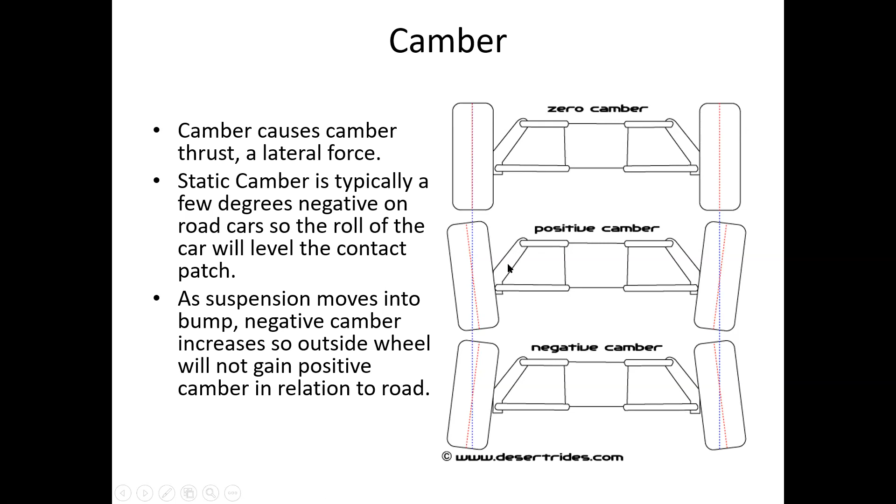Positive caster increases steering effort, making it harder to turn your steering wheel. However, you get steering feedback - the driver feels how much traction the steering wheels have. It also self-centers, so you can let go of the steering wheel and it comes back to center, which any production car does. If you don't have that, it feels kind of spooky driving a car that doesn't return to center on its own, and it's just not safe.

Having positive caster actually increases your negative camber through steering angle - when you steer the front wheels, if you have caster, your outside wheel, the one taking more load due to weight transfer, will actually lean in a little bit. We'll get more into that later.

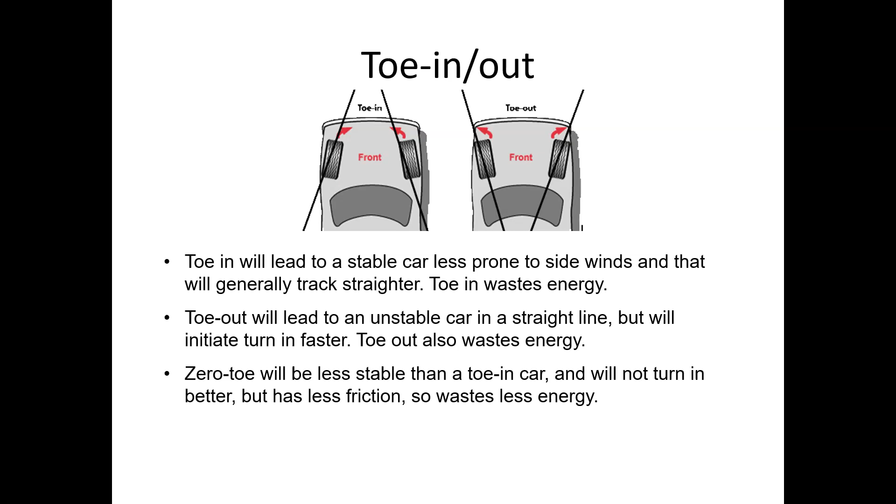Now, rod ends should not be loaded in bending if you can avoid it. And if you can't avoid it and you load a rod end in bending, make sure you do the math to show that it will survive. I'll get into where you can find an example math problem of that later on our website. So try not to put rod ends in bending.

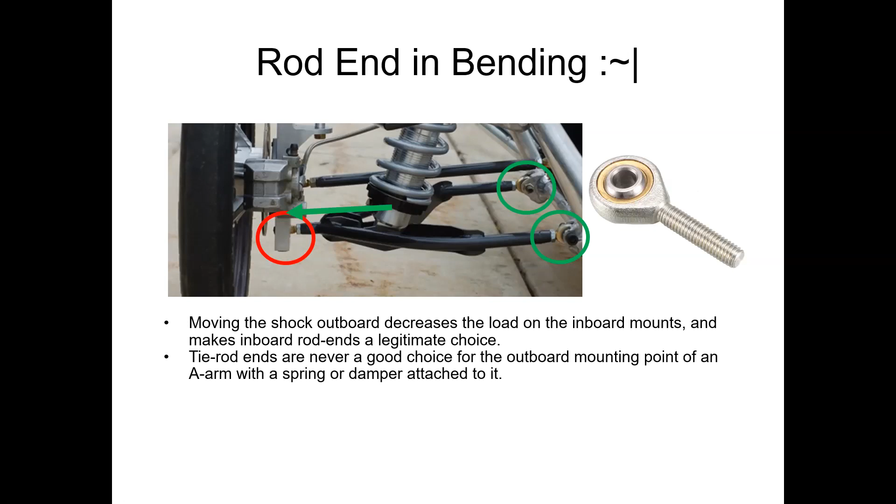Regardless, this one out here on the A-arm that has the shock attached to it is going to be loaded in bending, and it's going to have a fair bit of bending force on it. That is not a good idea with a rod end, because this part here is not made to be loaded in bending.

So an alternative to using a rod end at the outboard side of the A-arm that has a shock on it is something called a spherical bearing, which looks very similar to this. It just doesn't have this part over here that isn't supposed to be loaded in bending.

So when you design your A-arm, you would make a round enclosure, press fit this in, and have a snap ring on at least one side, either a shoulder or a snap ring on the other side. Ideally, a shoulder on one side and a snap ring on the other. You can't just rely on friction to hold these in. By the rules, you have to have a positive engagement, such as a snap ring.

Another alternative to a tie rod end would be a clevis bushing. So if you just had a tube in your suspension, and you put maybe some Delrin bushings or bronze or whatever in there and put a bolt through it, that works pretty well.

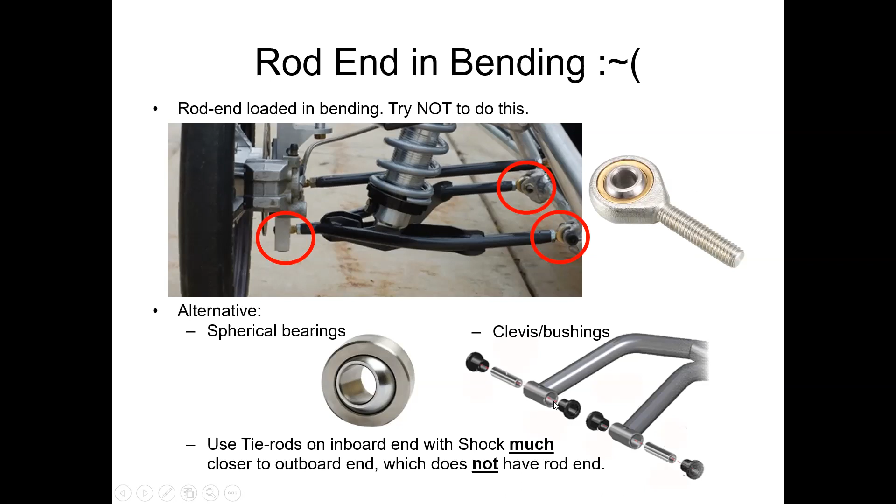Built-in adjustability. I would really stress this on any car, especially cars for teams that are just starting out, or for people starting with even an established team. Really, any car, make sure you have adjustability in your suspension.

And I don't mean just the capability of adjusting your camber or caster, but the capability of adjusting parts from where you intended them, or where they wound up after manufacturing, to where you wanted them to be. Because tolerance stackups don't always work very well, parts aren't always made to the right dimensions, and sometimes mistakes are made. So it's nice to have enough adjustability to make everything work the way you wanted.

If you build in adjustability, you can use less precise manufacturing methods, and it's easier to align your car. If you have an accident and damage some suspension parts or your frame, having enough adjustability might let you still make your suspension work even after that damage.

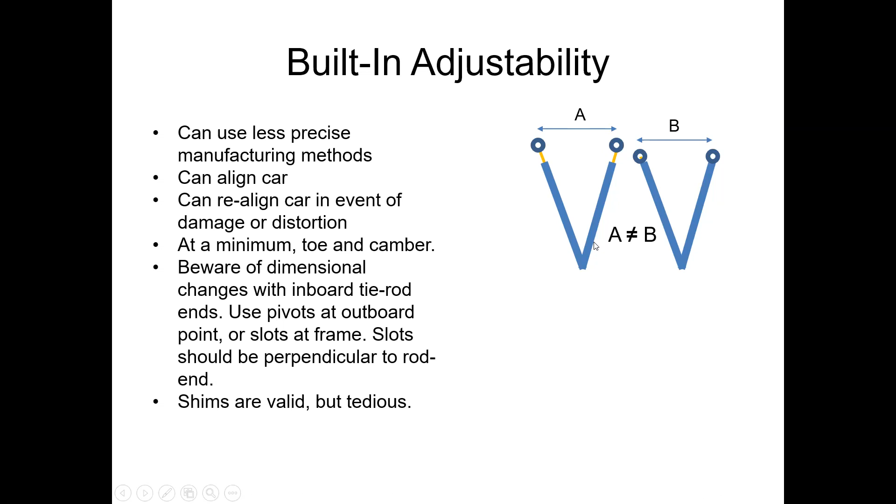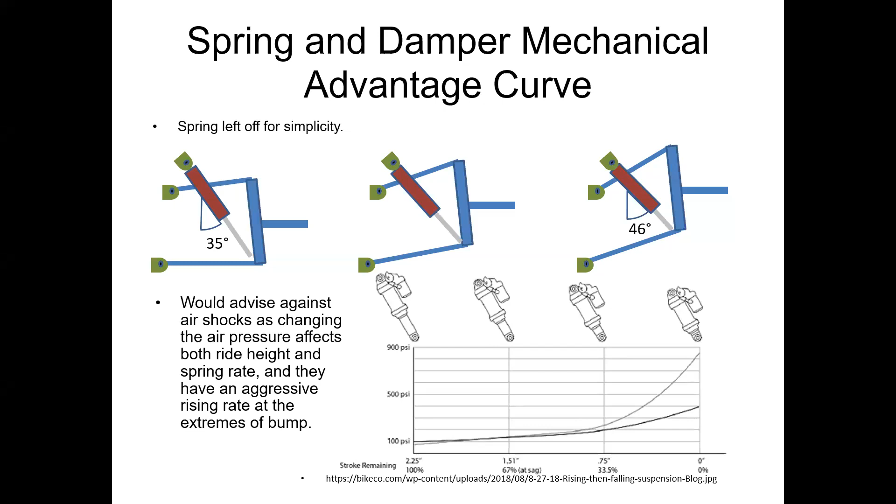So as you've gone about 3/4 of the way through the travel of the air shock, everything is behaving linearly, and then suddenly your spring rate starts climbing very quickly. So it can almost feel like your spring rate has gone to infinity, or you've run out of suspension movement, and you wind up with some spooky behavior in your car.

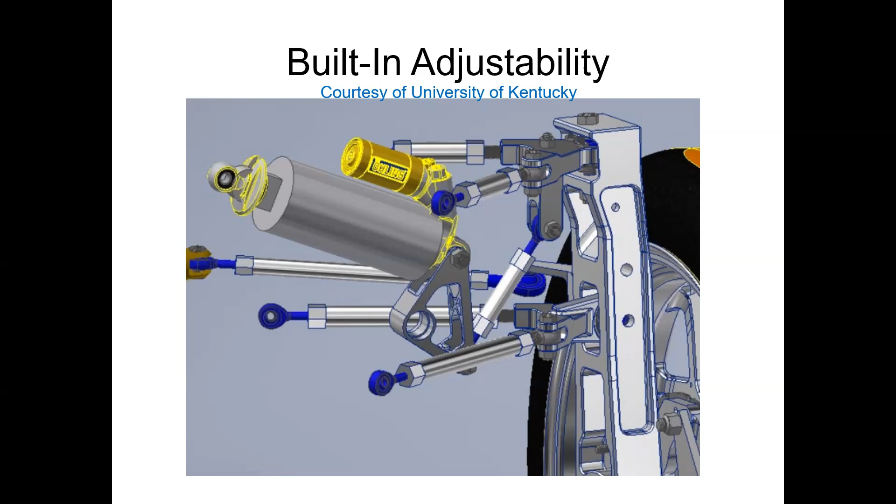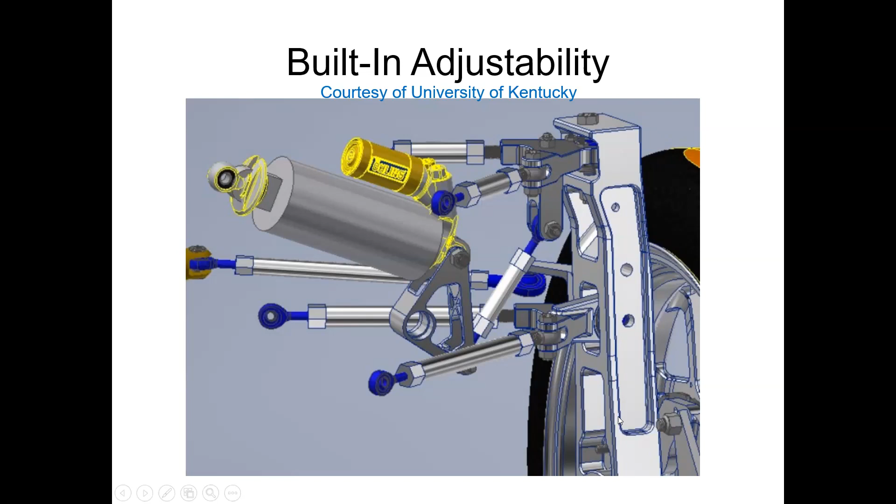They're happening way down at the contact patch. So if you look at this, let's imagine we're sweeping here. As you're sweeping, use this hand - if I kind of did these backwards to how you would think about it, just bear with me here, I'm actually making a point here.

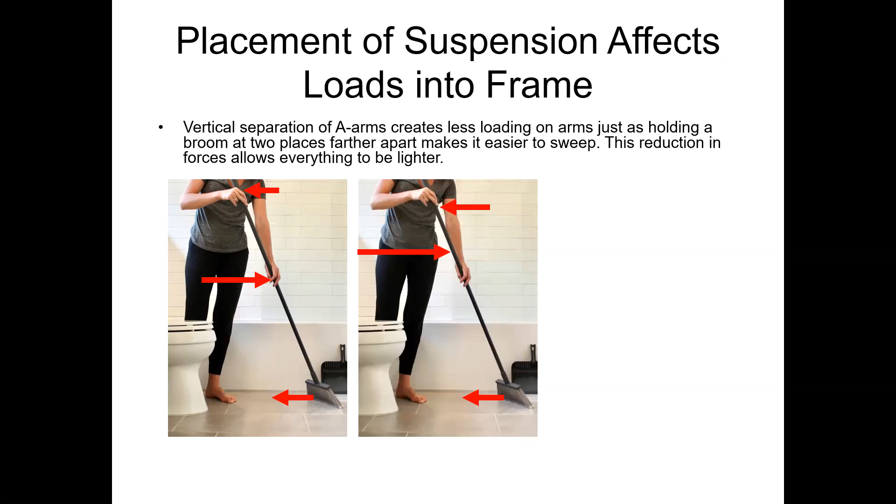Okay, so you're actually going to be pressing this way and pressing this way, and the broom is going to be moving this way, but the ground is going to be pressing on the broom this way. If you move your hands close together - imagine moving your hands closer together like this, holding them here - you would have to press pretty hard with your two hands to actually sweep with the same force going across here.

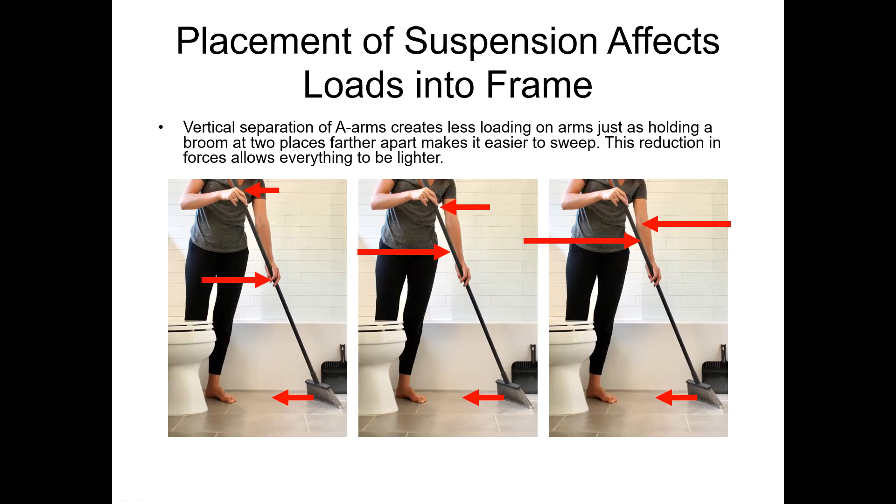And it's the same thing with the suspension on a car. If this is your upright, and here's your axle, and here's your wheel, if you've got your mounting points here and here versus here and here, or at the extreme here and here, the amount of force that you're going to have to put on these two points is ridiculous, because you're reacting a torque being created by this force here. So this force is going this way. Your lower A-arm is going to push out, your upper A-arm is going to pull in, which may seem counterintuitive, but your upper A-arm is actually pulling in.

And the closer you have those mounting points together, the higher those forces are going to have to be to react to this torque.

So a better solution would be to have those mounting points as far apart as possible. And if you look at a production car, this is what you're going to see, where just about every race car that uses a double A-arm suspension is going to have the lower ball joint way down here and the upper ball joint way up here, or some even higher. Since they're outside of the tire, they can actually even have them up here.

So the reason I mentioned this is if you have lower forces in your A-arms, you also have lower forces on your frame. Lower forces in your A-arms allows you to make them lighter, and lower forces in your frame allows you to make it lighter.

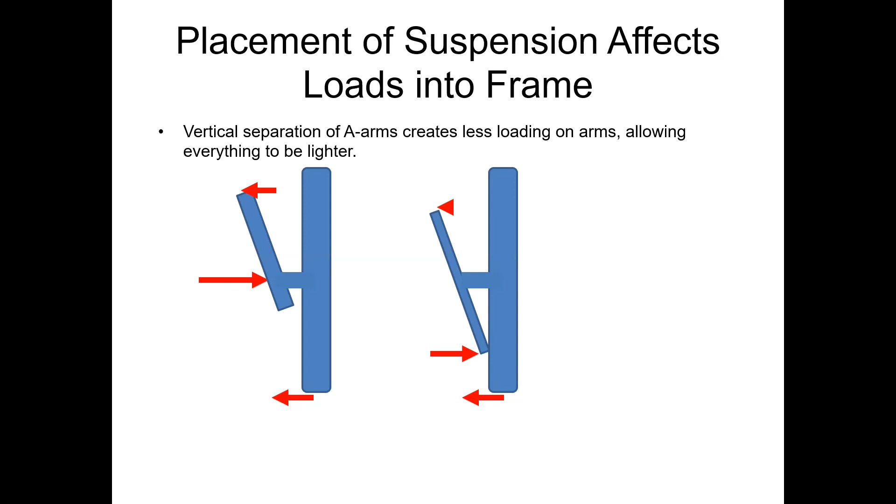Okay, weight transfer. So weight transfer is a function of CG height and location. I'm sure that's not really news to anyone. But the less weight transfer you have, the better it is for cornering. You can tell me theories either way about how it affects braking, but you need to account for this in your braking and your cornering load calculations.

So in your VDRs or your PVDRs, when you say we think that our suspension will be able to take the loads from cornering and braking, I want to see the math of why it can take those loads. And ideally, I would like you to take into account weight transfer when you do that math.

So lateral transfer, as in when you're cornering, weight transferring from the inside of the car to the outside of the car, your wheels on the outside of the turn now have more load on them. So how much more load do they have? What is the new normal force there?

So when you're doing the cornering calculations of can your suspension take this, it's more realistic to actually say we have this much force on our wheel, taking into account weight transfer, than just saying we have a quarter of the weight of the car on each wheel.

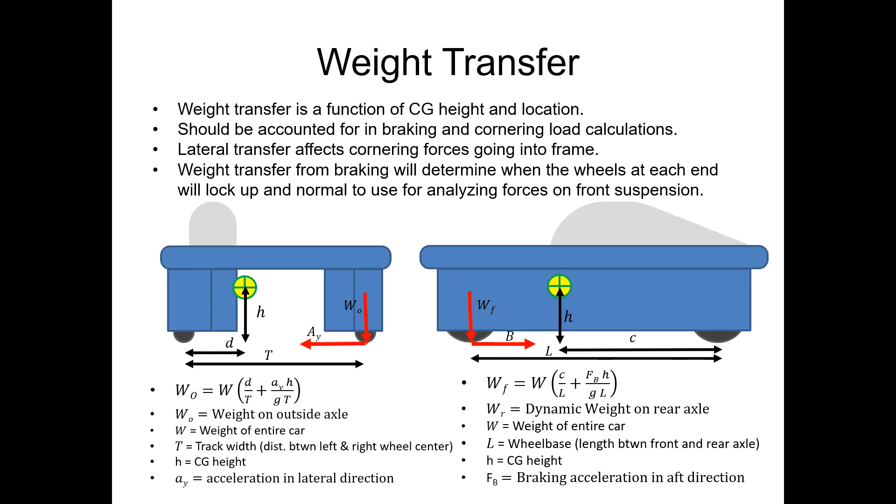I'll skim over roll centers a bit here.

Okay, so basic suspension analysis in the VDR. I want to see something like this printout here - this is a PDF that's actually on the site. If you go to the American Solar Challenge site, under regulations, there's the Solar Car Design Reference Material, and then down here, front suspension static analysis. It actually lists all the equations - I only showed the fancy picture part, but there's all the equations underneath. If you have a rod end in bending, the sample analysis for that is here, rod end stress calculations.

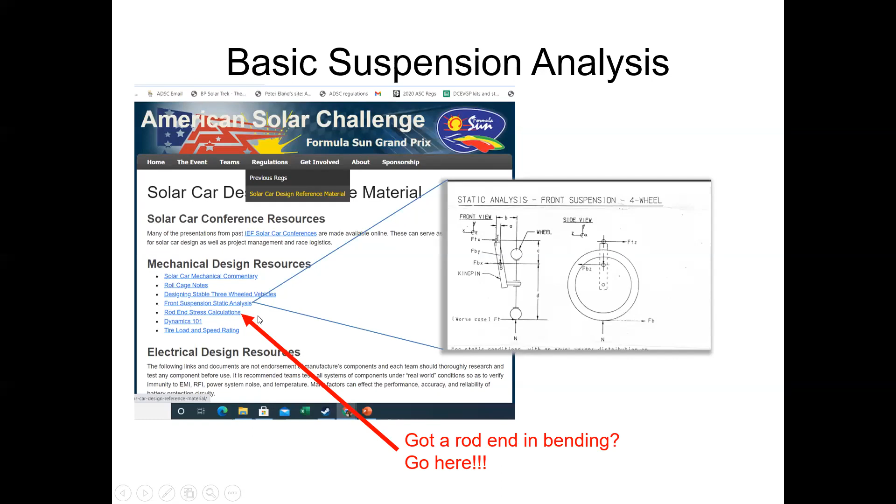Okay, on to this. I would like to note that this was actually put together by Dick Roberto, and when I first saw it, I thought there was a mistake until I reasoned through why he would have done it this way, because Dick Roberto is a very smart guy. I figured it out and I asked him and he confirmed it.

But something to keep in mind - this analysis is actually done for the inside wheel of the car, which, coming from the Formula SAE world, seems counterintuitive to me, because in Formula SAE you really only care about the outside wheel. That's the important one for the geometry, because it's taking a lot of load, since in Formula SAE you're trying to corner at as high a G as possible. So you wind up with a lot of weight transfer to the outside wheel, and the inside wheel is just kind of along for the ride. However, in solar car, that isn't necessarily the case.

But the reason I see to actually look at the inside wheel is because the loading in theory might actually be worse on the inside wheel than the outside wheel. Let me briefly explain why that is.

So if you put your traction force here, this is your cornering force at the bottom of the tire. This is the tire, here's the rim, goes up to the axle. So here's the bottom of the tire at ground level, and you've got your force going this way, which would make this the inside wheel of the car. So the inside wheel has the force going this way, your normal is going this way. In this situation, if you were to sum torques around this point or this point, your normal is going to create a counterclockwise torque around either of these two points. Your cornering force is also going to create a counterclockwise torque around these two points.

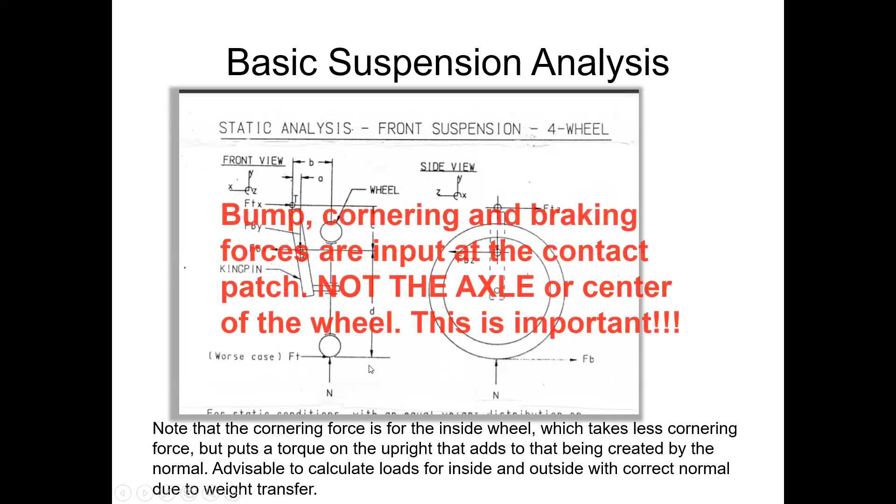Okay, designing suspension parts for loads. You're just going to design your dynamic loads as static loads. And by the rules, we require that you apply a minimum of 2G in bump, as in pushing the wheel up.

1G of braking, 1G of lateral force. I would like you to do that with your suspension loads, including weight transfer. For your inside wheel, you can decrease the normal, but for your outside wheel, you should increase the normal. For braking, for your front brakes, take into account that you're going to have weight transfer to the front of the car, so you're going to have increased normal up there too.

Now, this 1G lateral force, keep in mind that in 2019 at Circuit of the Americas, Kentucky's car rounded the track in, I want to say 3 minutes 41 seconds. Somebody can correct me on that. They said a blistering pace, and at points they were cornering at over 1.4 Gs. So if they had built their suspension to 1G of lateral force, their suspension would have failed. So this is just a minimum.

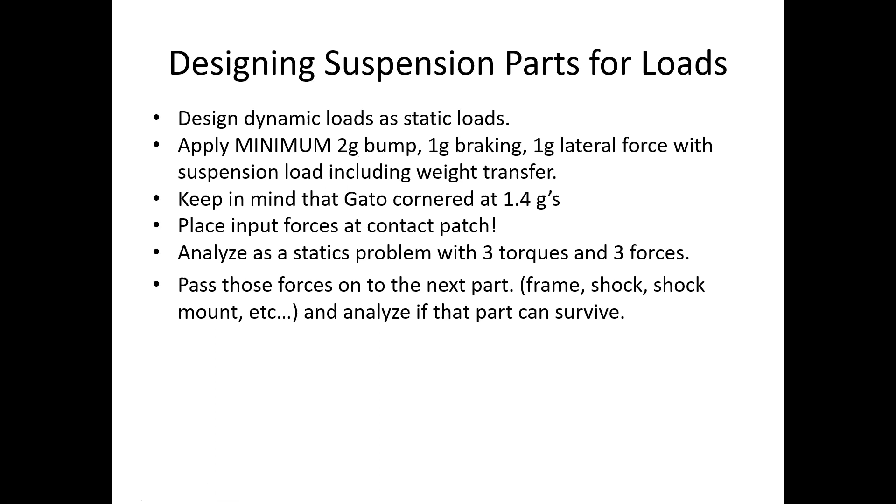Okay, so your brake performance analysis. What I kind of want to see in the VDR is, will your brake system survive, and will your car survive your brake system, and will your car actually be able to perform at the level that we require it to perform at to pass dynamics. So in dynamics, we require that your car can stop at 4.72 meters per second squared. So to get your car to stop at that acceleration, how much pedal force is required?

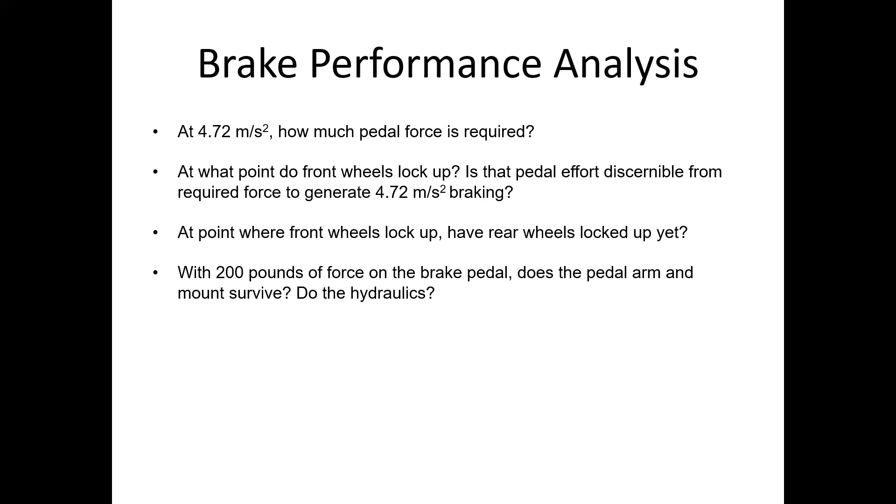Now I put this page together as kind of a sample page. I'm not going to go through this one by one. I'm hoping that you guys can pull up this presentation later and look at this. If you want, you can email me and I will email this back to you. This is basically kind of some rough calculations. It's not the only way to prove to me that your brakes will work, but it is a way of doing it.

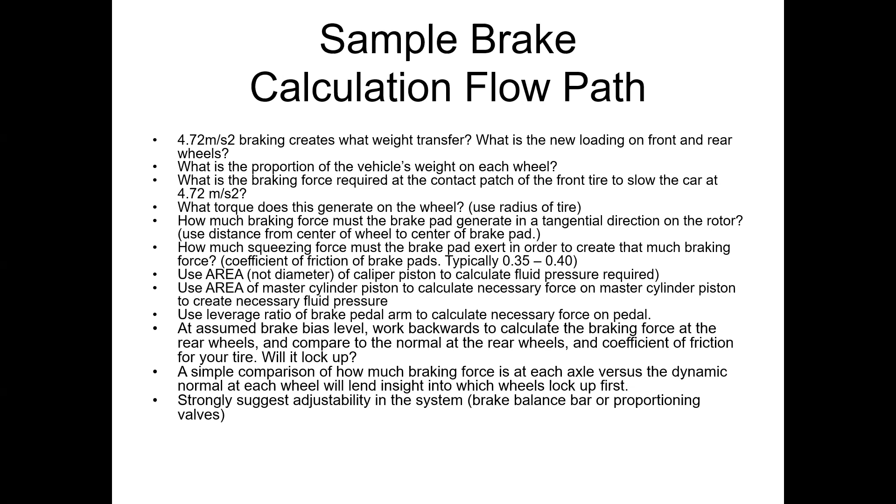Now, camber gain from bump. If you remember back from one of the very first slides, camber is how the wheel is leaning in or out. This is a view from either the front or back of the car. As these wheels move up and down, they're actually leaning in or out. They're not leaning all that much, but if you look carefully, you can kind of see a stair step effect, so it is leaning in a little bit as they move upward.

The reason it's good for a car to do that is as these wheels are moving, one up and one down, that would be happening in a corner, where the car is probably rolling to the outside. So if you have that wheel leaning in a little bit, that counteracts the roll. In theory, your wheel should still be pointing up and down, or maybe even a little bit in, or if it's leaning out, it would be leaning out less than it otherwise would.

So camber gain is a good thing. It's enabled by having a shorter upper A-arm. So this one here, note that it is shorter than the bottom one, or by tilting it downward as it goes in.

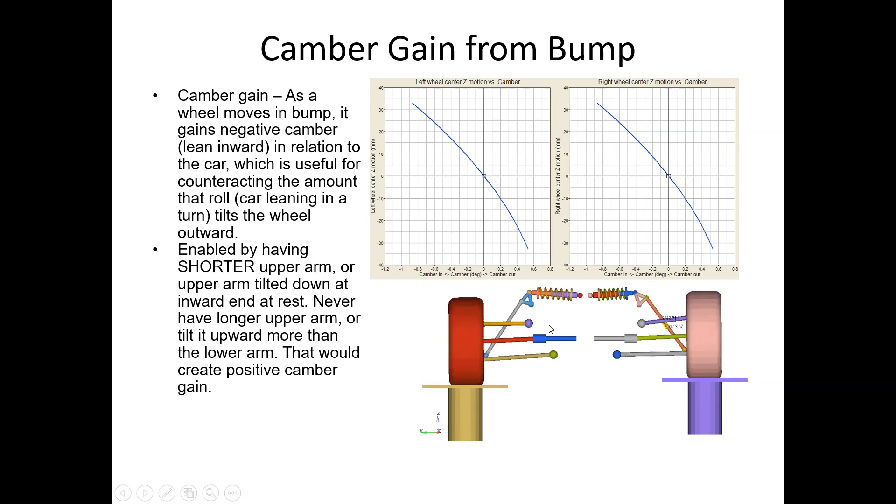Okay, now something that might actually be more important to think about when you're playing with the length of the arms and the angles of the arms and the rest position of the arms is scrub.

So as your suspension moves through its range of motion, it would be good to try and keep the contact patch from moving laterally. You can have the top of the tire or other parts move laterally, but try to angle it at different points through its movement to keep the contact patch of the tire at pretty much the same point. That's something where if you just work with modeling software and toy around with your suspension, you might be able to optimize that.

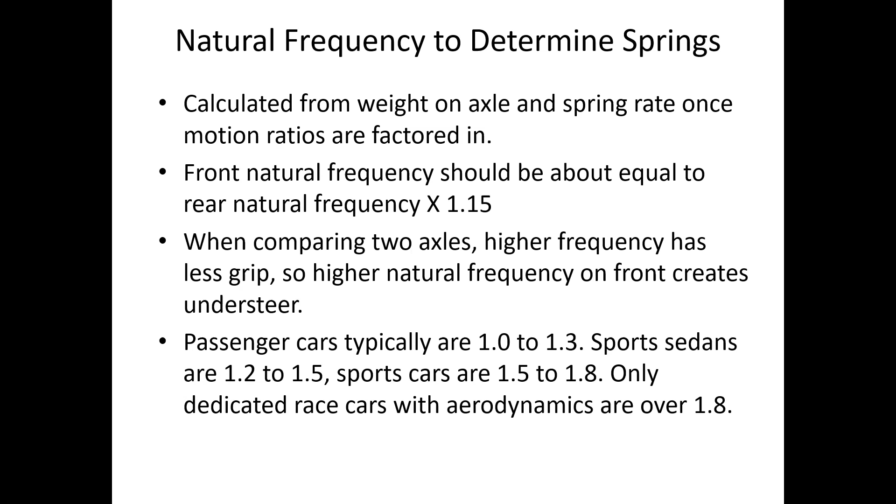Only dedicated race cars with aerodynamics are going to be over 1.8. So if you have your natural frequency up in the 2 to 3 range, I'm going to say, why are you doing that? I have said that to some teams that say what their natural frequency is. Typically the answer is, well, we like to control our ride height more closely, so that's why we want very stiff springs. It's like, but that's going to make your car kind of bounce over bumps that it should be trying to absorb.

Okay, quick review on caster, because we're about to get into how caster affects things. Actually, we're running short on time, so maybe we shouldn't get so much into that. But one thing to go over real quick: caster increases the negative camber gain through steering angle for both inside and outside wheel. What I mean by that is, if you remember, negative camber is the one that you want. So if you have caster built into your steering, as you turn your wheels, it's going to actually induce camber on your wheels. It's going to have your wheels lean into the turn.

Now, kingpin inclination is going to do the opposite. The more kingpin inclination you have, the more it's going to give you positive camber gain on your outside, actually for both wheels. So if you have more kingpin inclination than you do caster, your wheels are actually going to lean to the outside as you turn, which is not going to help. Since your wheels lean to the outside, it's going to tend to push more to the outside. Your car is not going to go where you're trying to get it to go.

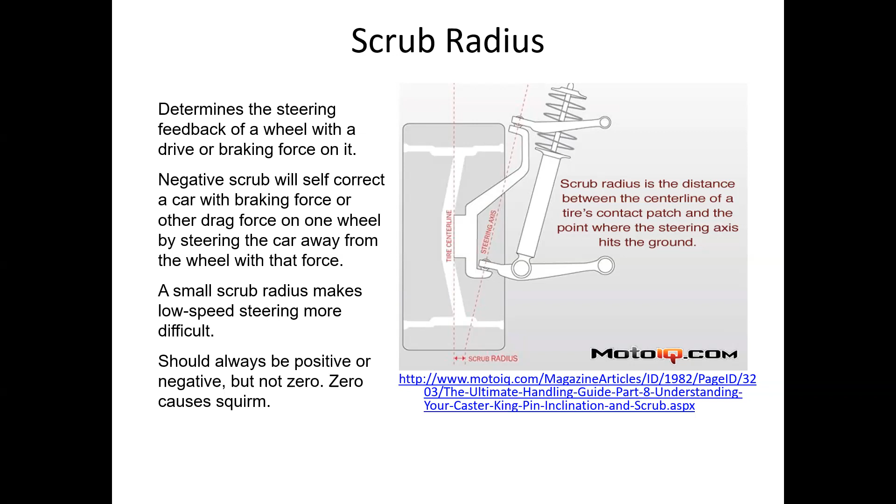This is another thing where I wish I had more time to get into, but I don't. So you can look at that hopefully later.

We've got 30 minutes before we have our next issue, so you can run long if you want. Oh, they're not going to kick me off or anything? I don't think so. Okay, well, I'll run with it then.

Okay, so let me see if I skimmed over anything. I think I hit that enough. Okay, so I will get into this, and in reality it would be better to go to my kind of bonus material that I put at the end here.

I can't actually read the title there, but let's go into a hypothetical scenario. In this scenario, we're going to have 15 degrees of kingpin inclination and 0 caster stacked right up here. So we have more KPI than caster, which is a situation that I said you should not do, because caster is going to give you negative camber gain on your outside wheel.

So this is what will happen to your outside wheel. As you turn your steering, your wheel rotates forward. See how this axle is pointed downward and your wheel is tilted outward? So that wheel is leaning to the right. It's going to push this way, even though you're trying to get the car to go that way. This is not what you want.

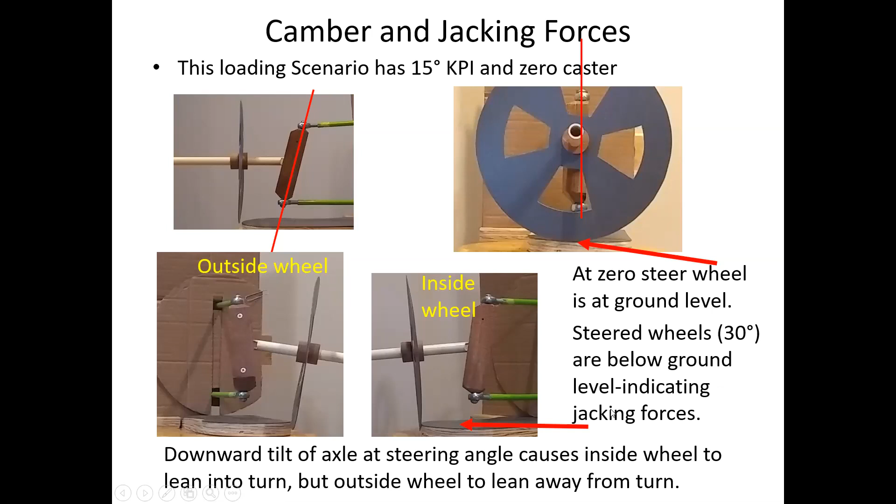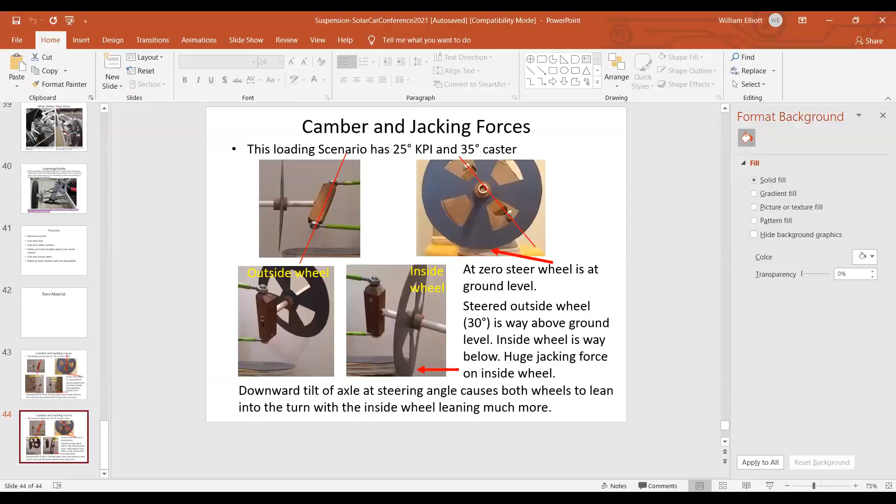What just happened? I'm not sure what happened. Looks like you ended the slideshow. Oh, you're back. Okay, let's try that again. I think you accidentally clicked, and so it took you to the end of this lecture. Oh yeah, that was the last slide. So yeah, that's probably what happened.

Okay, so your outside wheel in this situation is going to move upward, which means it does not have a jacking force on it, it's not going to fight you. But your inside wheel is moving downward. It's got a jacking force on it, but you've got weight transfer off of that. So caster is not going to fight you as far as jacking forces. The weight of your car isn't going to dictate the jacking forces fighting your steering feel with caster, but it will with kingpin inclination, because kingpin inclination gives you jacking forces in both directions.

You can play around with these two parameters, kingpin inclination and caster. I'd suggest if you play around with them in your steering system, don't set them to something ridiculous like 25 and 35 degrees. I'd be more in the 5-degree range. But when you play around with them, just check how far your wheel moves in a vertical sense, and that will give you your jacking forces.

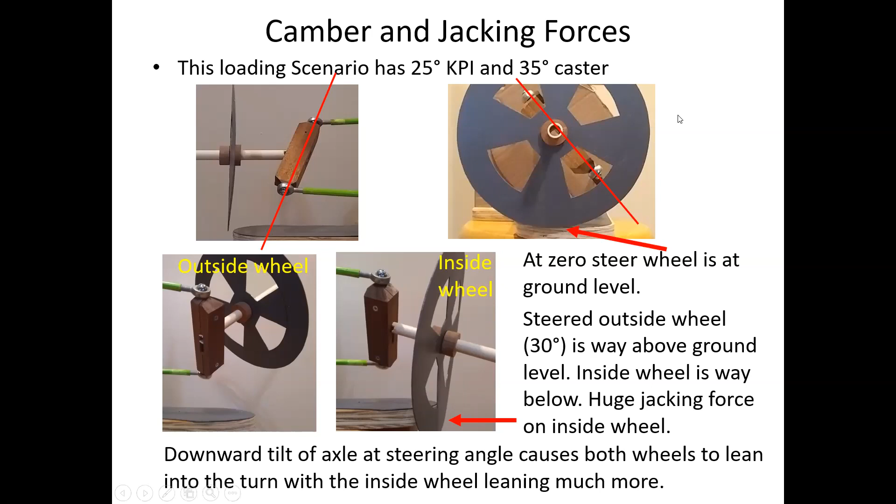I'll get into the other part of the steering feel thing in a second. Let me go back.

Steering torque is going to be dictated by the jacking forces, which I just talked about, and something called mechanical trail, which I think I omitted from the presentation.

Your mechanical trail is the distance from where your steering axis hits the ground to a vertical line, where I mean where your tire hits the ground.

If you imagine lateral forces happening at the contact patch and your steering axis is here, that lateral force at the contact patch is going to create a torque around your steering axis.

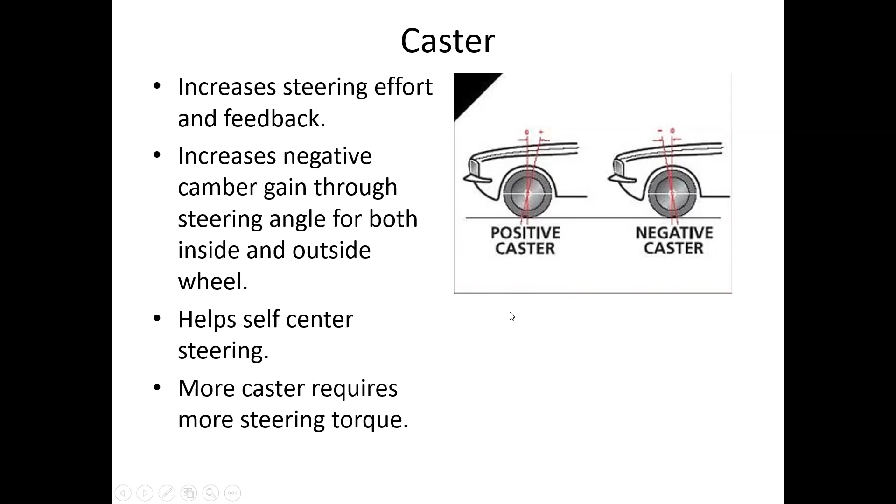Let's try and wrap our head around this. I'd say close your eyes and imagine this, because I don't have a picture for it. Maybe closing your eyes works better.

Imagine a bicycle going into a turn, and you turn it to the left. Bicycles have caster, like the front tube that connects the handlebars to the fork with the wheel, which is tilted back at an angle. So you wind up with that mechanical trail I mentioned.

So let's all turn left on our bicycle. As we try to turn left, the contact patch of the tire is going to push on the ground to the right. The ground pushes back on it to the left, so that lateral force on the wheel is going to the left.

And that lateral force is creating a torque around your steering axis, going to the left. Now, for us to go left, we're pushing on the handlebars in a counterclockwise direction. That lateral force at the contact patch is pushing on the wheel around the steering axis in a clockwise direction, because it's going to the left and is behind the steering axis.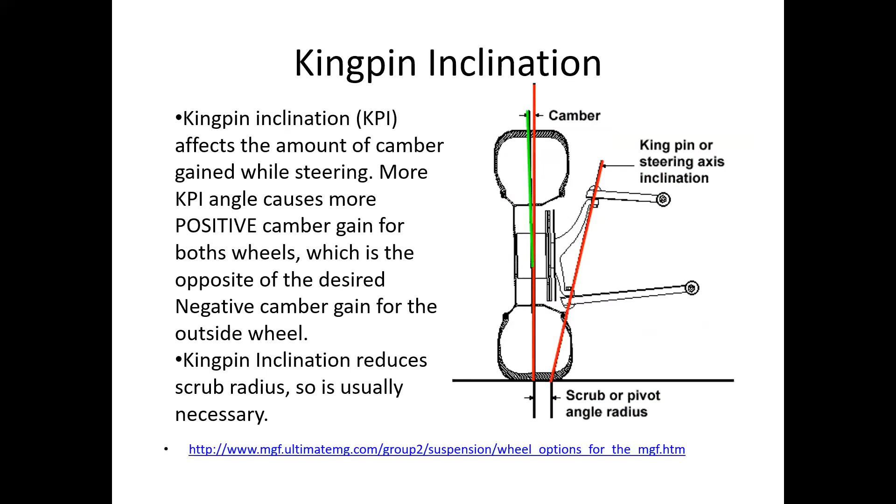Now that we've closed our eyes, and can open them again, I need to get back to the right slide here. So the camber induced by steering that we went over at the very end of the presentation.

Positive caster increases negative camber gain through steering for the outside wheel, and it only works for the outside wheel. So caster helps your outside wheel.

The kingpin inclination increases positive camber gain through steering for both wheels, but we also pointed out that it increases the jacking force on both wheels.

In conclusion, since negative camber gain is desired for your outside wheel, your positive caster should exceed or equal your kingpin inclination (KPI).

We kind of touched on the jacking forces in those last two slides. That's basically how much your wheel is trying to move downward through the ground plane, which is actually lifting your car up.

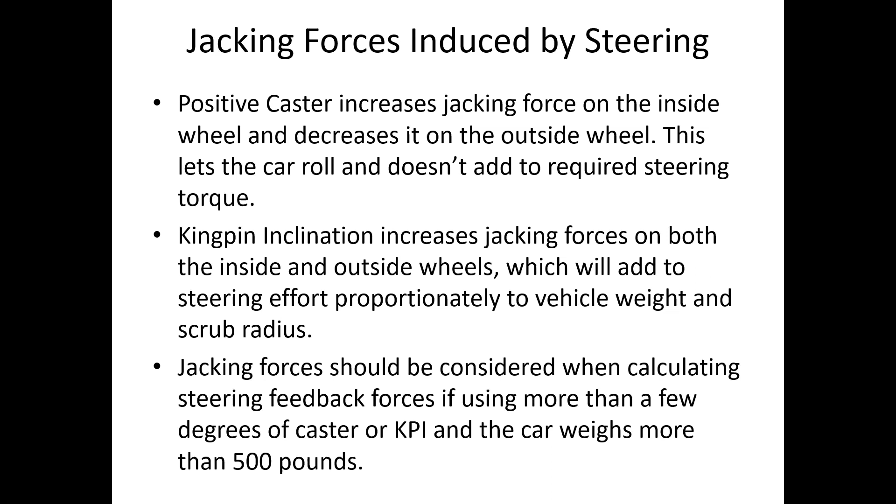I think we kind of went over this a little bit. Steering torque is affected by the torque produced by the product of the mechanical trail and lateral loads. That was our close our eyes and ride a bike thing.

Steering motion creates jacking forces. So if you're actually lifting a corner of the car by turning the steering wheel, that's going to be hard to do.

But here's something that's going to be harder to quantify: the friction in the system. So if you have a catamaran car with a very intricate steering arrangement, like the picture we saw that I cannot find now...

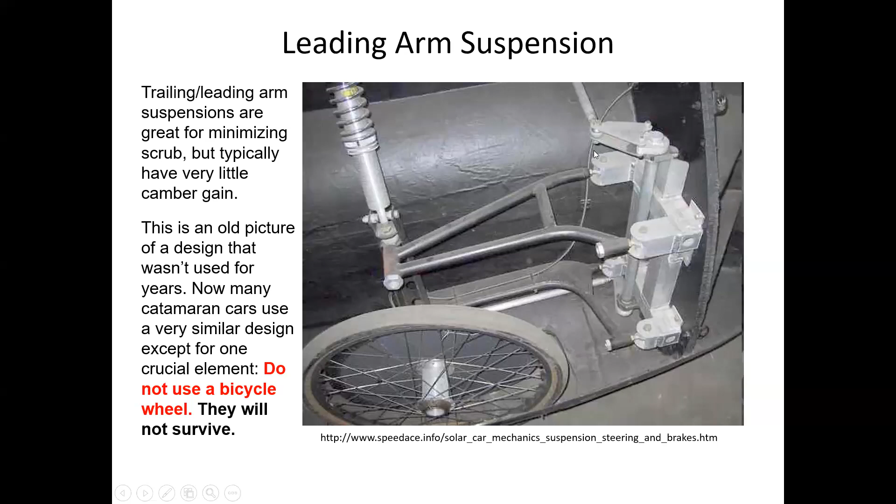Here, if you have this very intricate steering arrangement, you have friction there, friction there, friction there, and up here, and at your lower ball joint. You have all that on the other side of the car too, if there's any other linkages in there. So at all those points, you're going to have friction, and that adds up. That's something to keep in mind when you're trying to figure out how much steering force it's going to take just to get your car to turn.

Roll centers, this was touched on briefly. A roll center is kind of the imaginary point where your car actually rolls about. And when I say roll, I mean how it tilts side to side.

Now, if we were to... I think I'm going back too far here. I'm looking for the scrub. Okay, so a car like this is going to have those points going way up.

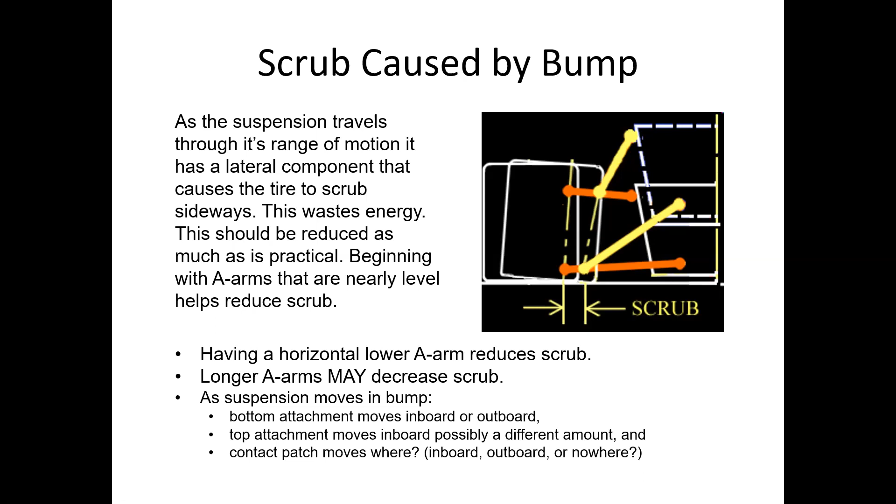So back to roll centers. Try not to have the roll center migrate through the ground plane. When I say migrate, I mean as you move your suspension, as this goes up, these angles are going to change, and this instantaneous roll center might move down here. And when it does, this line drawing over to your contact patch meets the other line for the other side under the ground. When it goes from above ground to underground, you get spooky handling. So I would keep it low, but not too low, not right at ground level, because then it might actually migrate through ground level. It helps to control roll centers if your lower A-arms start off nearly horizontal.

I think that's something I've said a few times during this presentation for other things. Just having your lower A-arms starting nearly horizontal helps in so many things. Shallow angles for your upper A-arm also help lower your roll centers, as in having this A-arm point downward. If you start off with this level and this points downward, you're going to wind up with your instantaneous roll center way over here. And the further away it is, the less it's going to migrate.

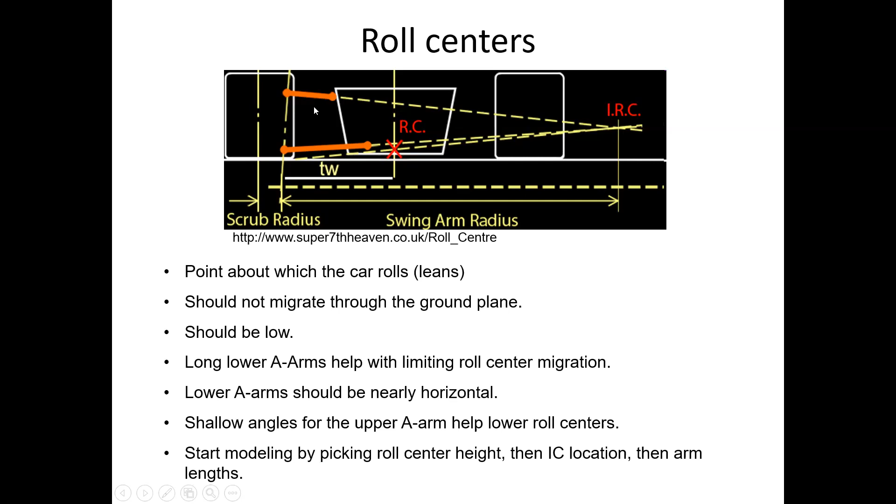Ackermann geometry is something that was actually created before cars existed. It was for horse-drawn carriages, and the person that created it did it at the wishes of a wealthy landowner that was sick of seeing wagon wheel ruts in their dirt driveway, and they wanted it to turn more efficiently. So Ackermann figured out - actually, I think it might not have been somebody named Ackermann. Ackermann may have been the person paying for the work. But in short, this is the geometry that they came up with, and it works.

So if you go through the steering axis and the outboard tie rod mounting point, and you have that line meet at the center of the rear axle, everything works beautifully. The outside wheel traces a circle, the inside wheel turns more, it traces a tighter circle, and everybody's in agreement and everybody's happy. This works very well at low speeds.

At high speeds, it gets more complicated, because each of those wheels are actually slipping, as in the direction it's pointed is not the same direction it's traveling. And the more load you have on a tire, the higher that slip angle can be. So you can wind up with this tire pointed this way. If this tire is turned more, you'd say that's good because it's turning on a tighter circle. But if this tire also has less force on it because of weight transfer, then having that angle be higher might not be sustainable. The tire might just say, I don't have enough force on me to sustain that slip angle, so I'm going to let go and give up and not give you any traction. I'll just be a drag force.

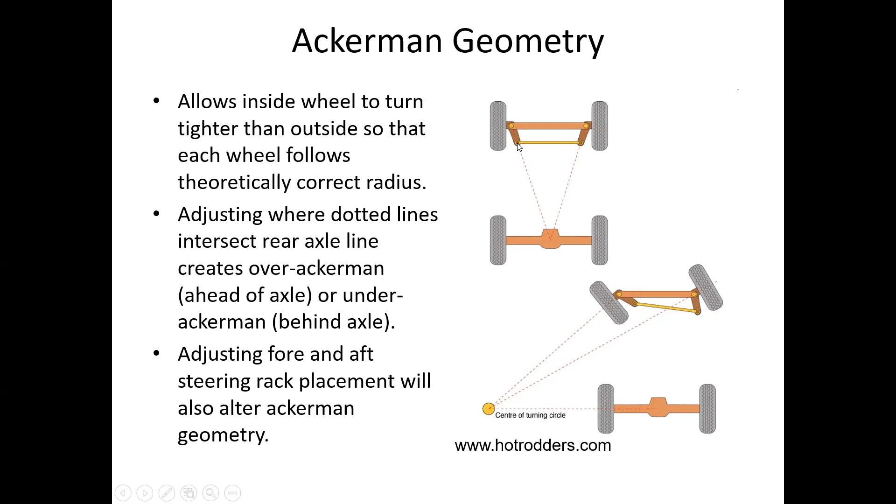So this is something that I think might be worth studying for some teams that have already got the rest of their suspension figured out. You can actually adjust the Ackermann of a car, not just by moving these two points in and out, but also by having your steering rack, which sits in the center here, move it fore and aft in relation to your outboard mounting points. But that's getting into like the 400 or 600 level class type stuff.

This is another example of Ackermann. You'll notice the steering axis - the upper ball joint is there, lower ball joint is there, so the steering axis is going down. So at the level that this arm is at, the steering axis is probably about there. And then their tie rod point is there. Keep in mind, this is actually pushed out a little bit because that wheel is rotated this way, rotated clockwise. So at rest, this point would actually be more in here.

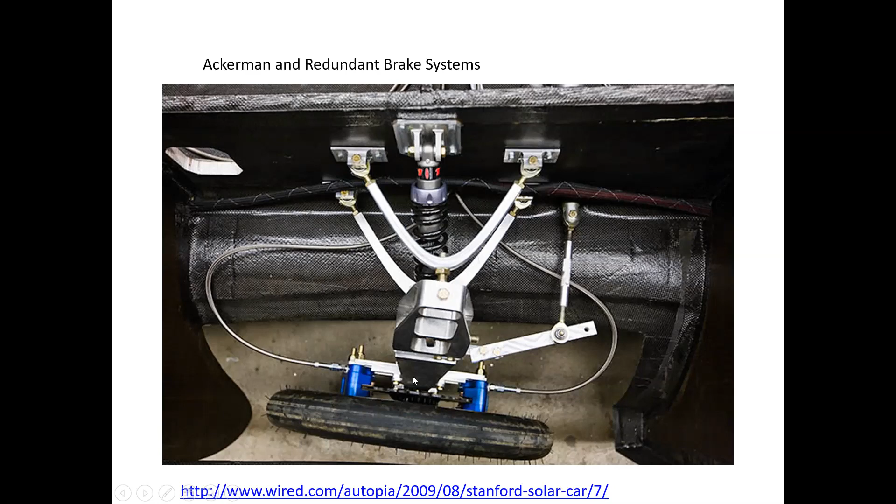So that line probably goes about this way, and it's going toward the center of the car. So they've got Ackerman there. There's also, while we're at it, redundant brakes. It's a good thing. What is the application of an anti-Ackerman geometry?

Formula One cars typically run anti-Ackerman because they'll have enough weight transfer off the inside wheel, and that weight transfer is making it so that wheel can't sustain the slip angle. But Formula One cars also have a really long wheelbase. With a traditional Ackerman setup, like if you had a very wide car compared to how long it is, once that wheel starts slipping, you could say it's not such a bad thing, because now it's generating a drag force on the inside, helping the car pivot.

But on a Formula One car, the lateral component of that force, since it's a narrow track compared to how long it is, is pretty far from the center of gravity. So they'd value having cornering force on that front wheel, because the moment arm — if you put a lateral load about the center of gravity on a relatively long wheelbase car — that long moment arm joined with that lateral force puts more torque on the car than if you put a drag force on that wheel, which only has a moment arm of half the relatively narrow track. So that's why Formula One cars run anti-Ackerman, to try and keep that inside wheel still generating some cornering force, even though it has a reduced load on it.

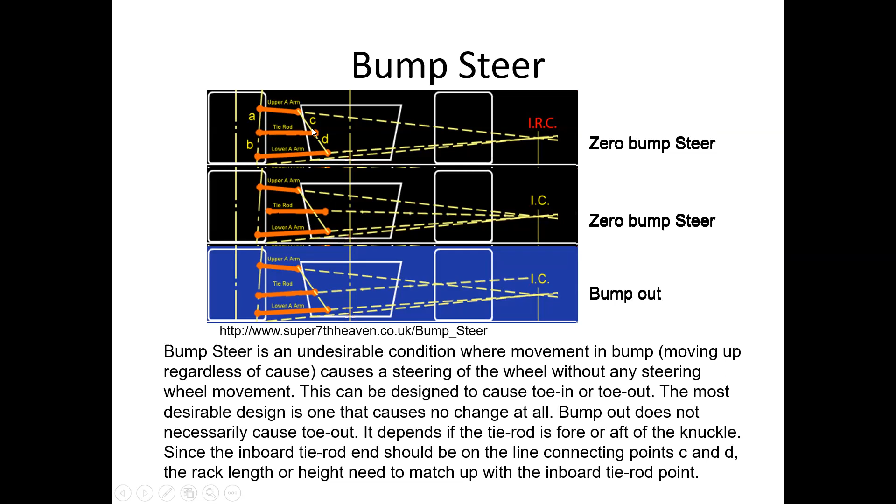Bump steer and U-joints on your steering shaft: the input angle and the output angle of a U-joint don't match up very well when you have an angle here that looks like about 30 degrees. So look at this, a 30-degree shaft angle. This is the output, this green trace, as your input shaft is turning at constant speed.

Because of this phenomena, I'd suggest if you used U-joints in your steering shaft, use two of them and put them 180 degrees out of phase, like this one. The force is coming this way. This U-joint is kind of opposite this U-joint, so the speed up and slow down of this one will actually counter that one. Or you can buy a double U-joint like this.

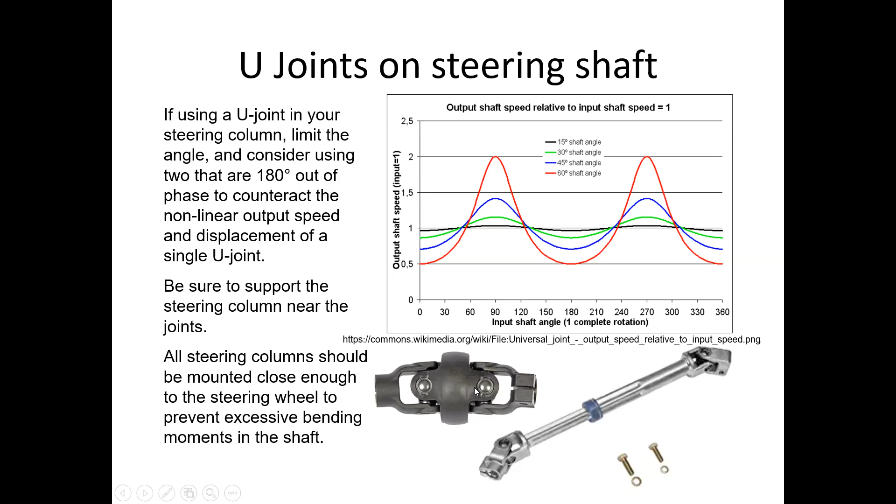Steering rack, I kind of just went over this a minute ago. If you have the outboard points of your steering rack, or say you have a very narrow steering rack like this and you decide to extend it out all the way to here, if you don't support this point out here, and the only thing keeping this rack from moving up and down or back and forth longitudinally along the car is these two mounting points here, unless that's attached to unobtainium and this rack is made from unobtainium, this point over here is going to move around in ways you don't want.

So I would suggest linear bearings like this at those points out here, or even something as simple as a pillow block or something out here for it to go through.

I've only seen this once, but I'll still mention it because I fear another team will show up with this. A few years ago, a team showed up with a worm gear reduction in their steering system. Worm gears are a one-way affair: you can put torque in here and it turns this gear, but this gear cannot turn this gear back. That means there is no self-centering to that steering system, and there is no feedback.

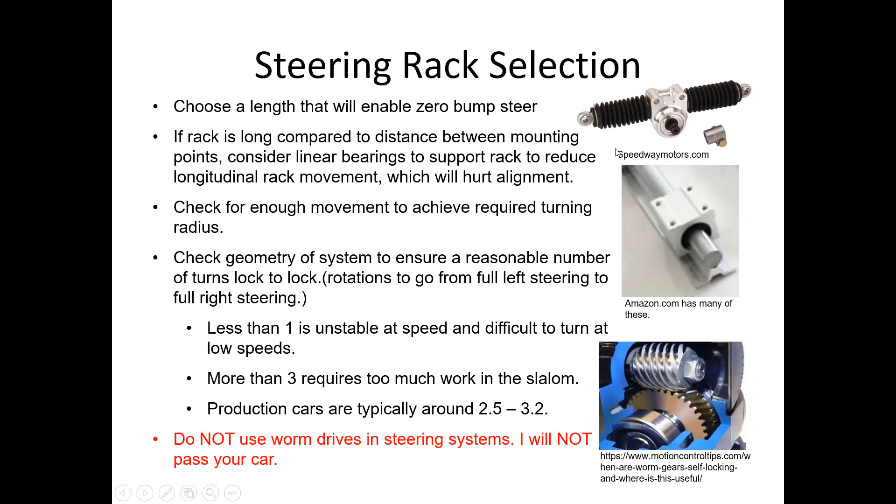That is, I would say, my preferred method to see. Or you can have the rack actually hit a stationary surface.

I've seen that on some catamaran cars where they'll have the steering rack, the end of it, before it disappears into all sorts of linkage going everywhere, something actually hits some stationary surface on the car. A protrusion on the steering shaft that contacts a stationary surface, as the steering shaft rotates, it has something sticking out of it and it hits a stationary surface.

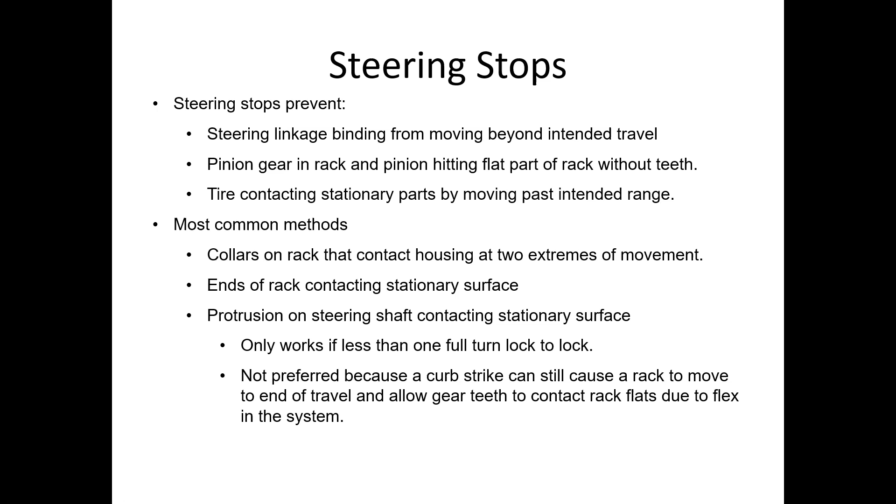But that only works if you have less than one turn lock to lock. That's not really reasonable for most cars unless you have very lightweight steering.

Okay, so sound engineering practices: don't have rod ends in bending, use double shear. I'm sure you've probably heard that before. Test before you come to competition. Let your suspension travel enough in droop, and that means the opposite of bump, as in when your car goes over a jump,

or the inside side of your car in a turn drops down as the car lifts up because of weight transfer. So in droop, don't allow your springs to unseat. Pay attention to the range of motion for rod ends—they're typically in the 15 to 18 degree range unless you buy special rod ends.

Test before the competition. If you use bell cranks, ensure that all elements feeding into those bell cranks and the bell cranks themselves are all in the same plane. You don't want to have push rods or pull rods acting out of the plane of the bell crank—it's going to put weird forces on the bearings holding the bell crank.

Think about all forces the component is going to see. Read and note the rules—that's kind of something for every competition. Use a reasonable safety factor and test before the competition. So make sure you test before the competition.

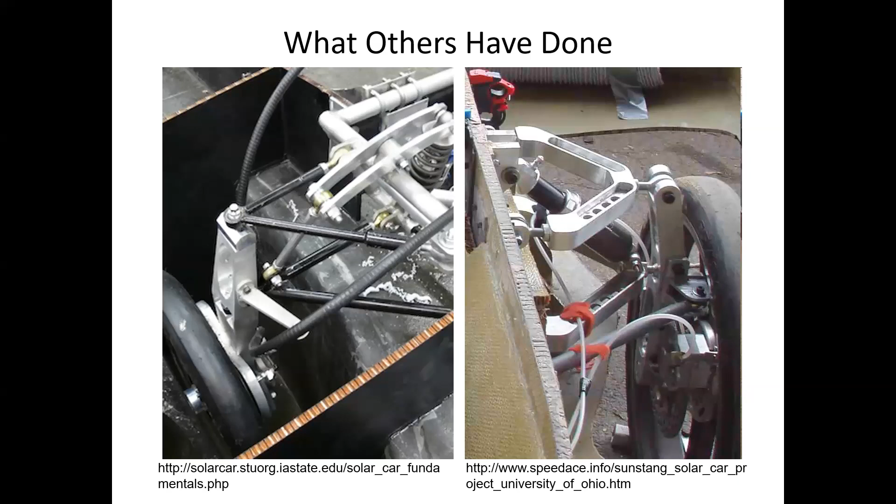I think we've run out of time, but yeah, we have definitely run out of time. Is Brian still here, or did you go to the other session? Brian went to the other session. Okay, good.

I have not. I thought I should give it a try today. I hear somebody talking, but I can't quite understand them. Are they asking a question? I think it was just somebody's background noise. Okay.

Just here's some examples of suspensions I've seen.

Okay, so that's your upper A-arm. That's a spherical bearing on the upright side there, so that's kind of the opposite of a tie rod end. The linkage here—this is the shock, and then the bell crank. That hits nice and far outboard, so that's a good thing.

There are designs where you can actually have this linkage attached to the upright itself. That gets a little challenging, but it has been done.

I put this on because here's an example of simple steel welded chromoly tube. This looks like it's probably 3/4 inch tube, so it doesn't take very large tubing. You can actually make a relatively lightweight arm out of steel. It's not some super fancy, super whammadine, 'ooh it's carbon fiber,' but it works.

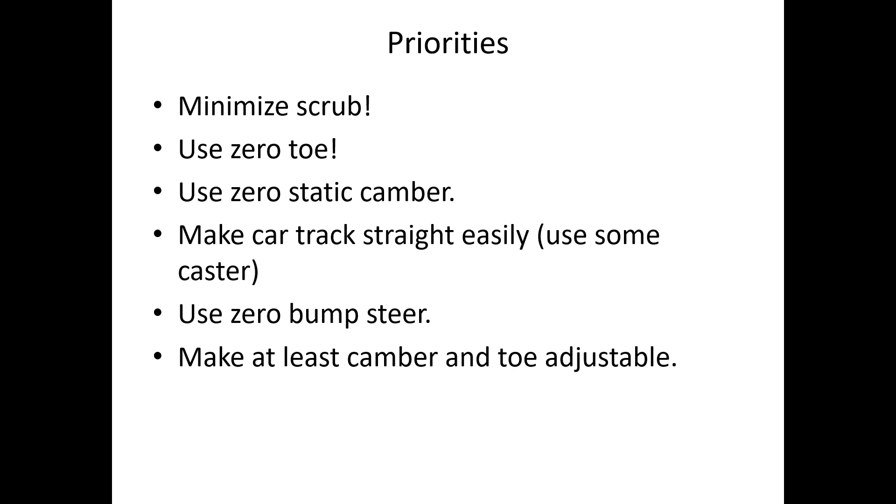So yeah, check rod ends, check, like I was saying earlier, where actually it might be faster to exit out and go back in.

So there's many ways you can wind up with a binding suspension. Sometimes the traditional way of figuring out if you've got binding is to just jack up the car, disconnect the springs, and move the suspension through its motion. Pick it all the way up into bump and drop it all the way down, steer your suspension a little bit and do it again, making sure it works at all steering angles with no binding anywhere. But that will not expose the binding that happens because your frame is flexing.